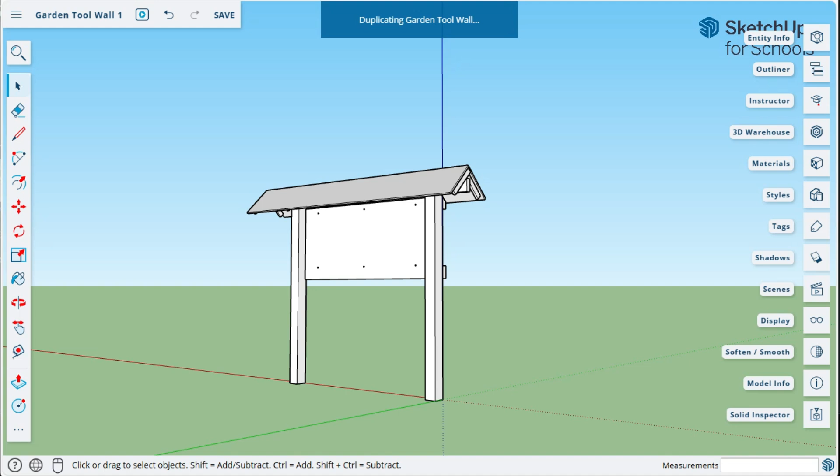In this exercise, we're going to create a little standalone tool wall for the garden. We'll be able to have a cover so we can hang some tools inside here, and it'll be on some 4x4s. We're using 2x4s, 1x2s, and half-inch plywood.

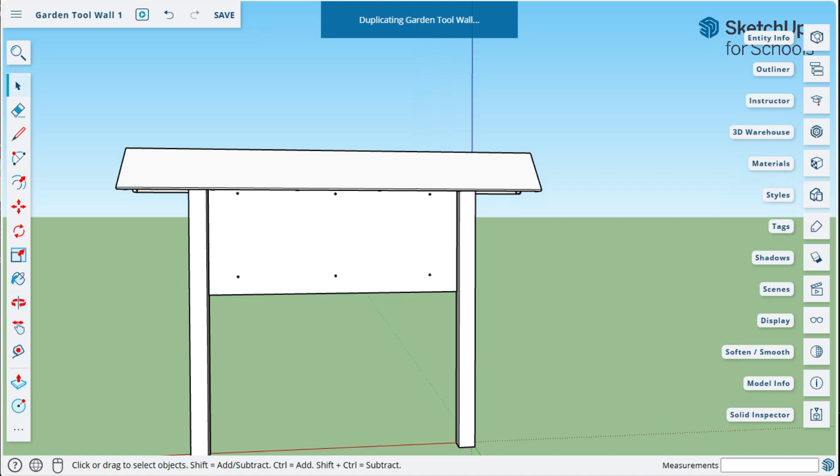So let's begin. We need to move our guy a little bit away from the axis, because that's where I tend to put the start. So I'll just move him off to the side here, and now we can begin.

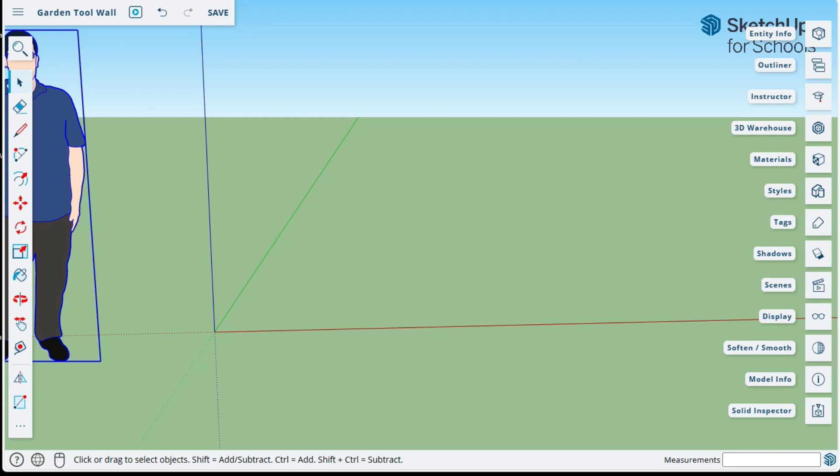So this is going to be based on using 4x4s as posts, some 2x4 cross beams or cross bars, and a little bit of a roof on the top that will shelter the tools.

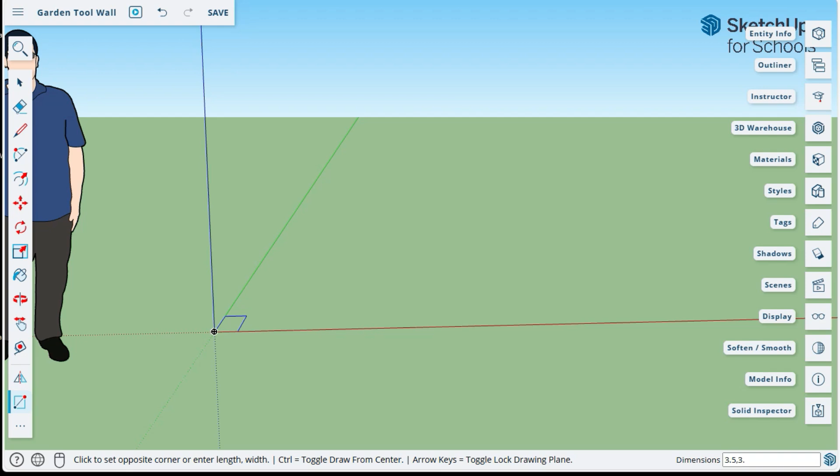And to get started, we'll make our first rectangle. So from the origin, I'll make my first rectangle. It is 3.5 by 3.5 inches. Okay, we have our first, and I'll use the push tool and raise it up 60 inches. That's 5 feet.

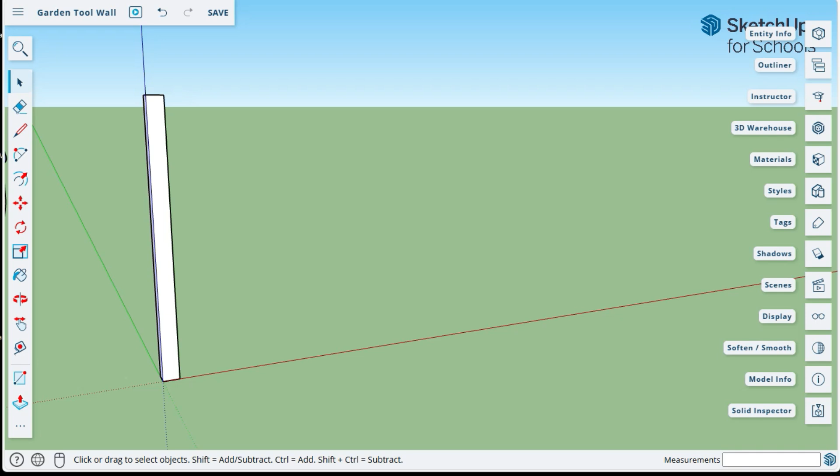Okay, so I've pressed the space bar to select this post. If I click on it once, I can see that I can select one surface or one line, or a combination of that. That means this is neither a group nor a component. And making components as we go is important, so you have to know that. But before we make a component out of this, I want to cut the top off at a 45-degree angle.

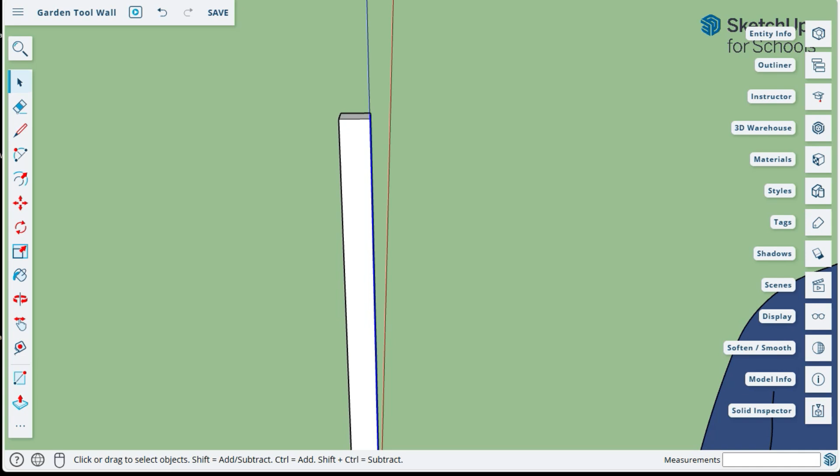Now, if this is 3.5 inches wide, then 3.5 inches down should enable me to find my 45-degree angle. So the easiest way for me to do that is the tape tool. I'll try to avoid clicking on the corner or the midpoint when I do the tape. 3.5, so that's my destination.

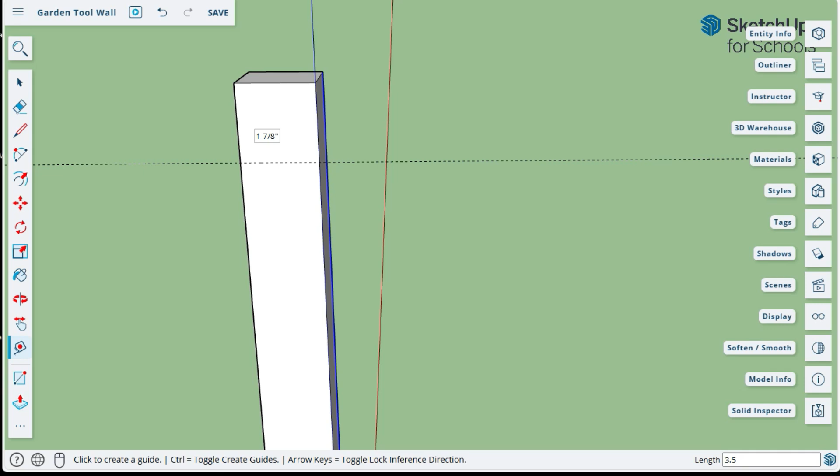And now I'll use the line drawing tool, L for a line. I'll click it here at that intersection. Okay, so I found it. And I can continue to draw a line all the way around, and this back to the top.

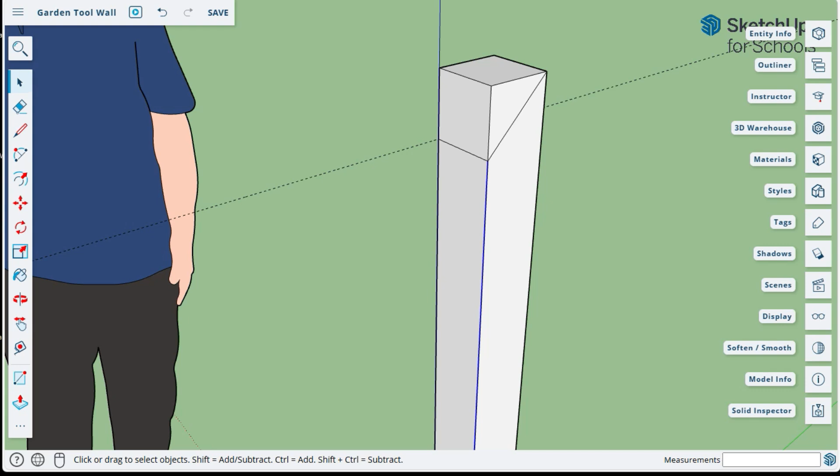And once I've done that, since this is not a component, I should be able to erase, E for erase, these 3 lines and these 2 lines. And now I have a post with the top cut off at a 45-degree angle. So this part here is still 60 inches tall, or 5 feet tall.

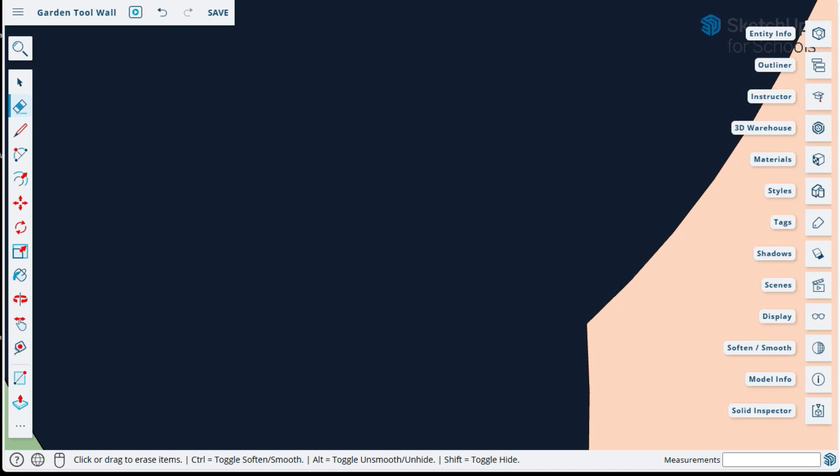Okay, let's get out of the guy. You know, I think we should move him some more. So I keep him there because I recognize he's a good scaler. If I were to zoom out when thinking I was zooming in and then not be able to see my work, I wouldn't know which way to go.

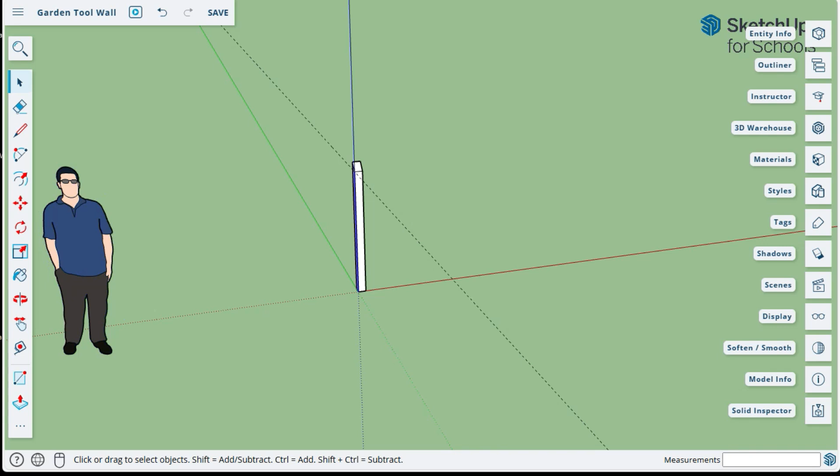Okay, so there's my post. To make a component, I need to select it all. I could draw a box around it, but I'm just going to click it 1, 2, 3 times. Everything is selected. Right click, make a component, and we're going to call this the post. There's only going to be 2 posts. They are identical, so that's a good enough name.

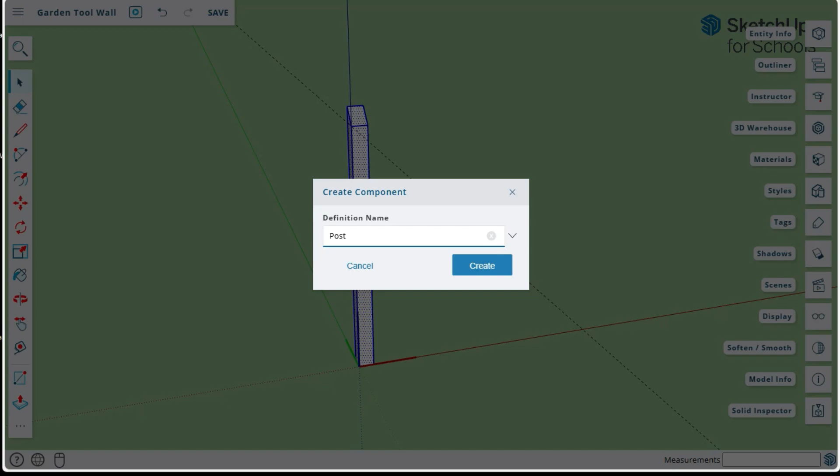Now, when it's 60 inches apart, it's not 60 inches on center. It's 60 inches from the outside to the outside of the other post. Well, that can be kind of a tricky thing to measure. So I'll use the tape.

And I'll start at the origin. I'll go in the direction that I want to. I'll type my 60 inches. I'll press enter, and there's a dot. I was hoping to get a line. I don't think I can get a line? Yeah, I can, of course I can. 60 inches, and there's my line on the dot.

Okay, good. Now I can move it. But instead, let's do this over again. Okay, to measure 60 inches from outside to outside, I'll use the tape, T for tape, off of the green line, 60 inches, enter, and there's my destination.

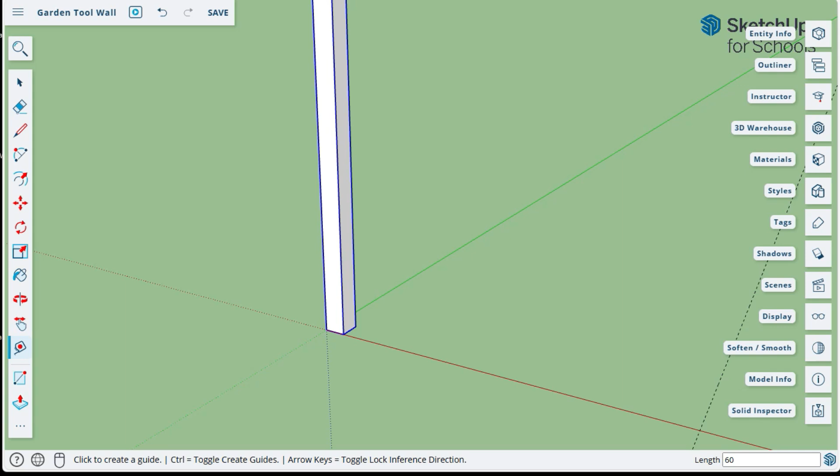So I need to drag this inside corner to here and make a duplicate. To do that, I'll press M for move. I'll grab that corner and I'll move it, and before I click, I'll press Control, and now I click and it's there. I like to press escape afterwards and spacebar so I don't accidentally move something else. So my poles are the right distance apart.

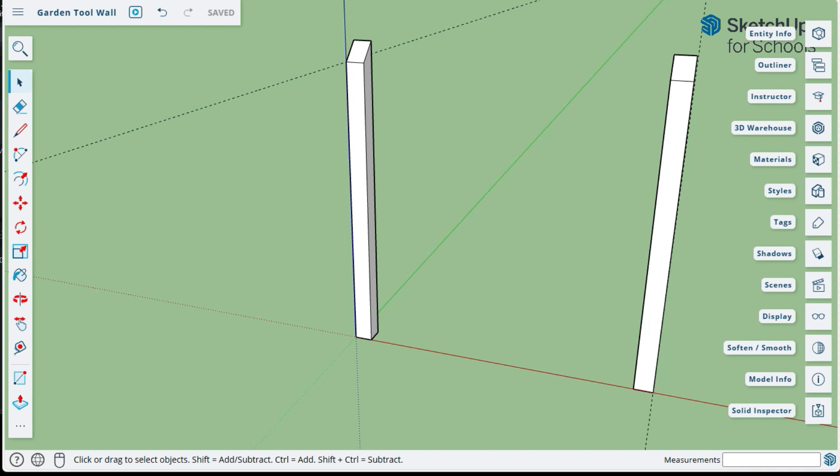Next, I want to create a board across the top to hold up the back side of my roof. This is going to be the back where the slope is. I'll add the geometry to do that, and we'll work right off of this corner because that's where it's going to be.

What we're going to put there is a 2x4. So I'll use R for rectangle and zoom in. It's on the red plane, so I'm going to constrain it by pressing the right arrow there. That should... oh, I clicked it, Control Z. Well, let's try to get it to do it. The right arrow.

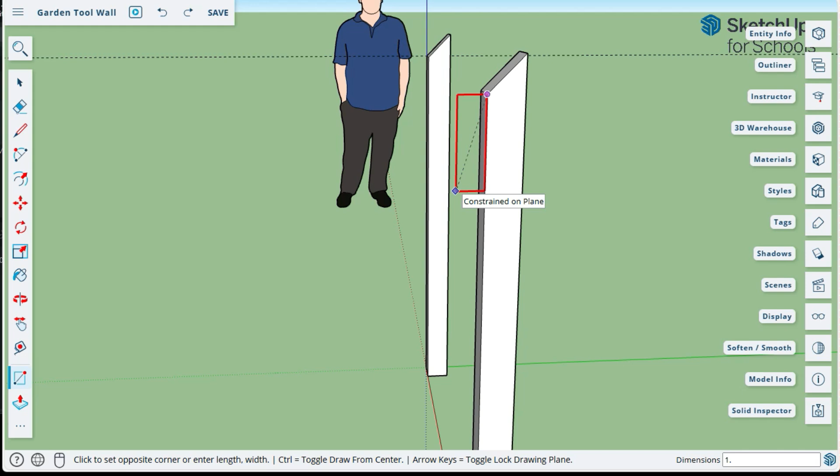There we are. So what is first, the height or the width? Well, if I look here, it looks like the width is first and the height is second. So I'm going to put it on this side. It's 1.5, isn't that true for a 2x4, by 3.5. And I press enter. So there it is.

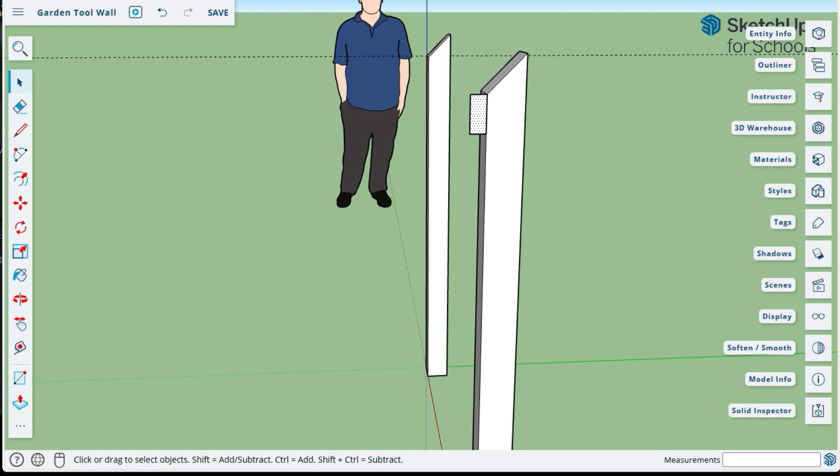Now here's what we have to remember: this is not a component, this is just a collection of geometry. I could triple click this and make it a component now, and that would actually work. I'd have to double click it to edit it, but that's something to know about.

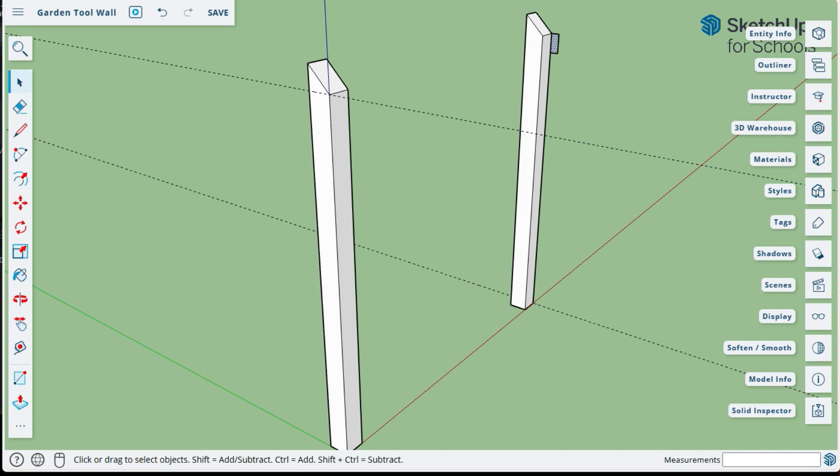I'm going to stretch this across from here to the destination. I always like to adjust my model so I can see clearly the destination. When I pull this across, you'll see me move the pull tool out into this open surface so it knows to snap to or stick to this line. Well, let's stop talking and get to work. So I'll click on this surface, I'll pull it, and then move this to that surface so it's on the face. That's what it lines up to.

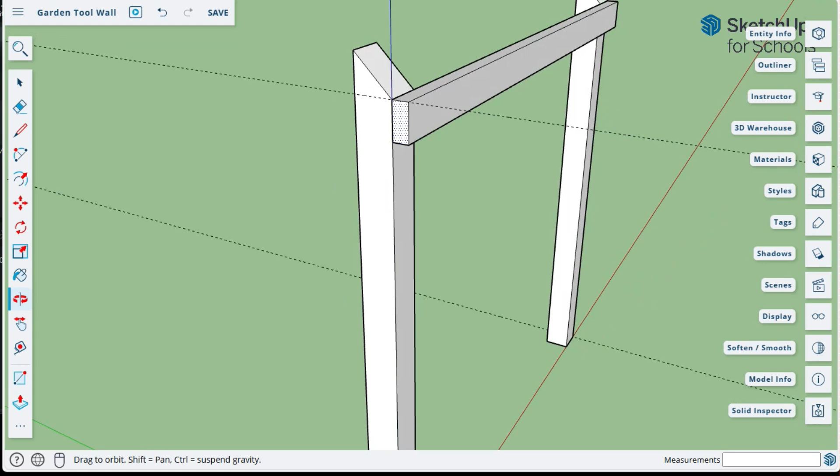So far, so good. We'll change back to the tape because I want to cut this 2x4. I want to rip the angle off to make it a 45-degree cut from the corner down to here. Now I think I can just use a line tool because I have this 45-degree line already. If I click on the corner, the end point, draw a line out, it infers that the line on the other side goes up in that direction. Let's just go down in this direction, and I have it.

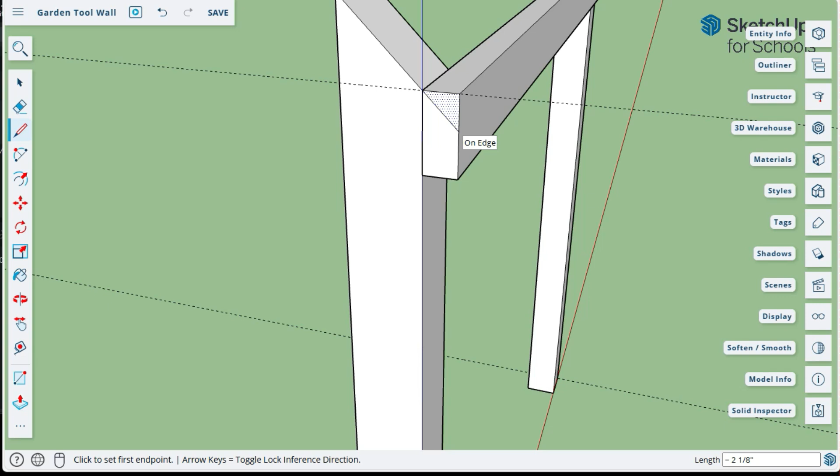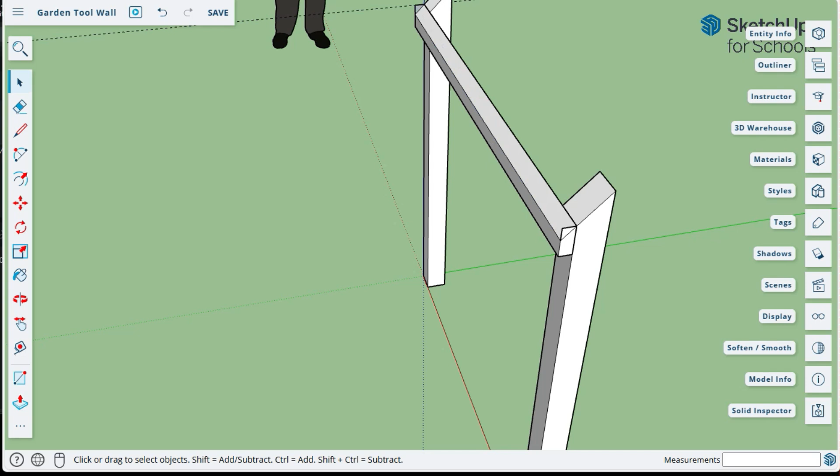Okay, I'll reorient it and draw my line from here. As long as it's red, I know it's parallel, and then it goes from here to the corner. Just like the corner of the post, I press escape, spacebar, click on this line and delete it. It's deleted that section. Now I still have the corners to delete, so what's quicker? Eraser and just cover both, or using the select key, spacebar, and clicking both individually?

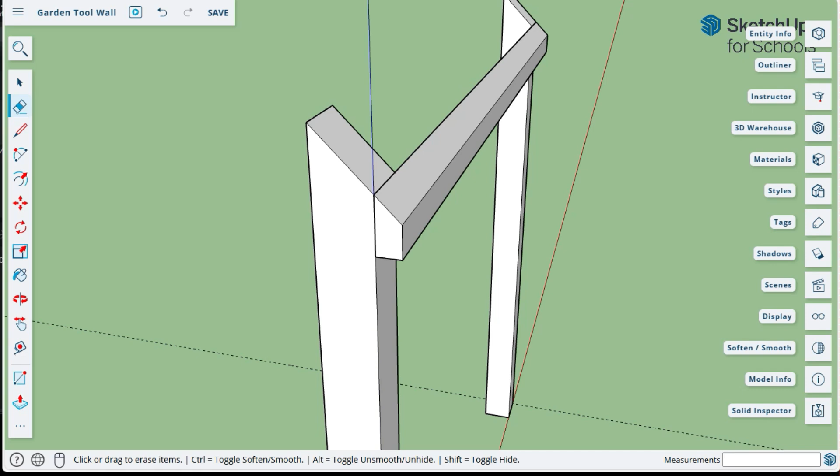Well, that's the 2x4 at the top that has the 3.5 inches here and whatever else is here. You know what's here, right? If we have a 2x4 where it's 1.5 inches down at this point, because that's its width, then whatever's left is going to be 2 inches. So my drawings say that I need another 2x4 about 1 foot 7 and a half inches below this, the top of it.

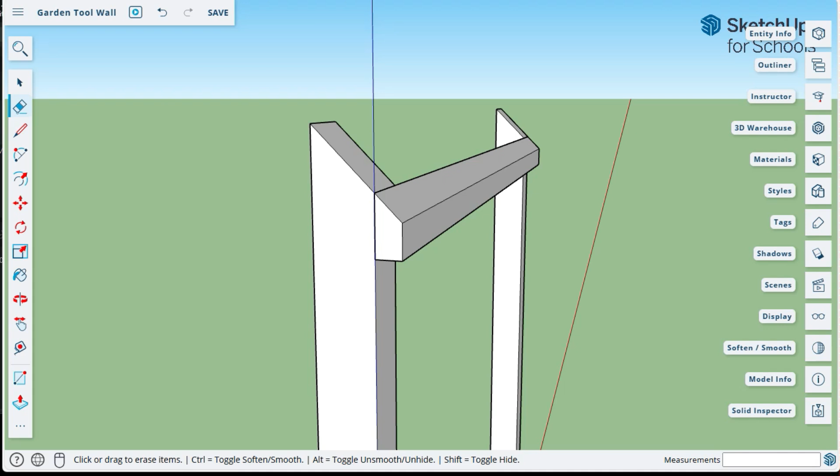So I'll get the tape again, T for tape, and this is where I've run into trouble, and that is if I start from this corner and go down, I'm not sure that I'm going to get a line. In fact, I'm kind of confident I'm not. Let's try it. So what did we say? We wanted 1 foot 7.5 inches. So 1 foot 7 inches and a half.

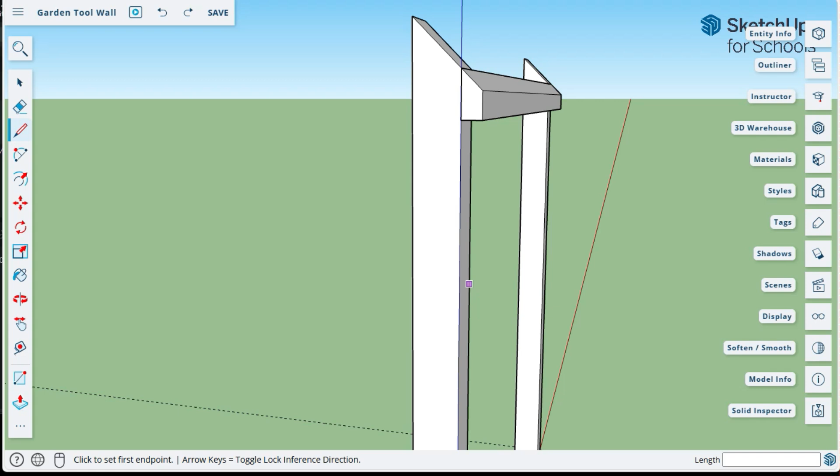And there's that dot. You know, I probably could use that dot, but I've not done that before. Let's do something that we're confident with, but it does involve some more geometry. Control Z will take that away. I'll go back up to here, and I'm just going to put a line out.

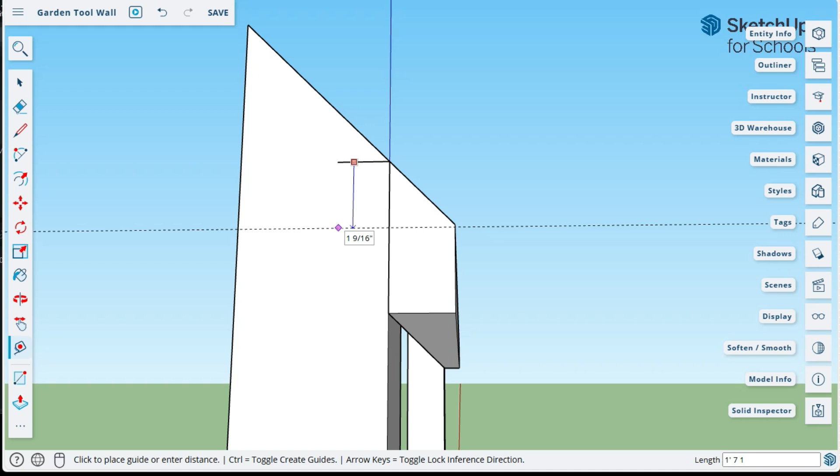There's my line, escape. Now if I use the tape tool, T for tape, somewhere on this line - I prefer not on the ends, not in the middle, there we go - and I type 1 foot 7 inches. I didn't make it a foot, did I? If you're looking in the corner, you'll see that. So it's 1 foot, single quote, 7 space and 1/2 inches. Did I get it? And there it is. Super.

I need to make another 2x4 down here, so this is the top. You'll notice I zoom out up here, move my mouse, and zoom in here with the roller. I just find that almost easier than panning, and certainly easier than shift pan.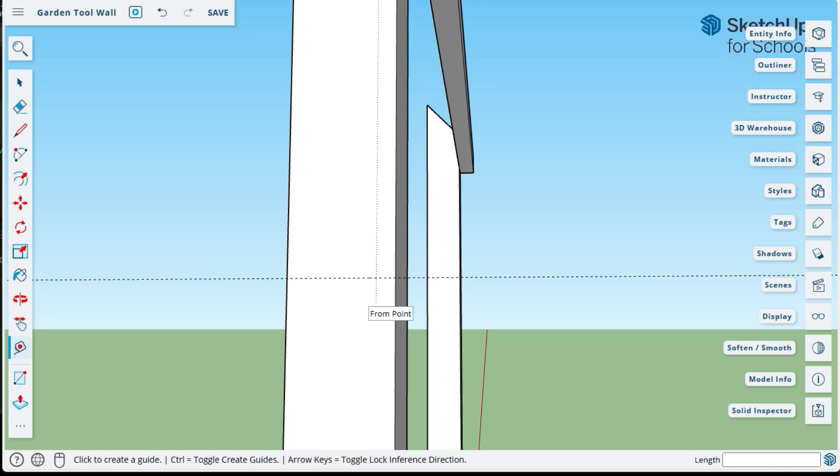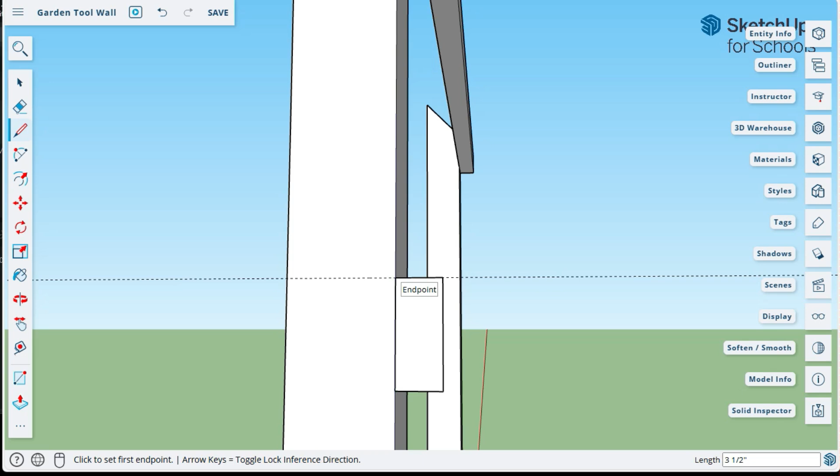Okay, so that's where my next 2x4 is going. This time, instead of using rectangle, I'm just going to use the line tool. I'll start here and draw out 1.5, then draw down - as long as it's blue, it'll be correct - 3.5, then draw back in. It's the standard shape, and then I make my part. This is just a 2x4 that goes from that outer edge to this outer edge. Again, I like to orient it so I can see my destination.

Press the push tool, and I'll click on this. I'll pull, rather, and put it on the surface.

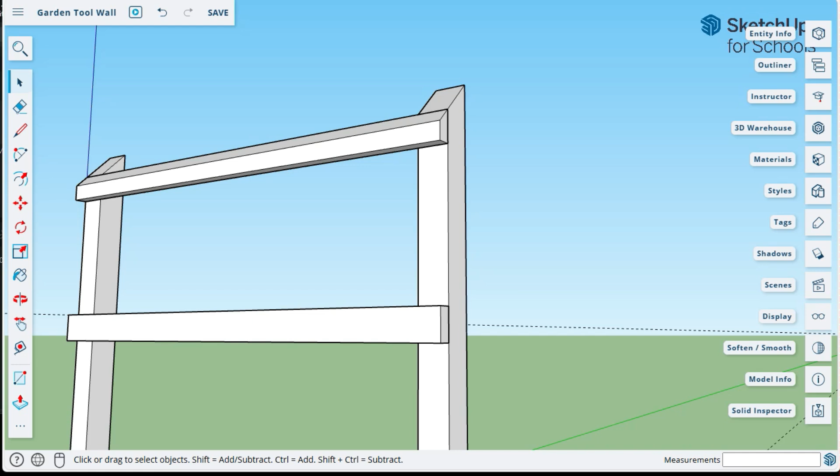Okay, so I just realized I took a risk. Anytime you make a component - rather, you make something that's supposed to be a component - and then you make something else, if they are touching at all, they are going to be one component. You can't separate them. And I did that. So if I look at this, this is not a component yet, and it should have been. As soon as I'm done drawing one of my objects in my sketch, I need to triple click it. There we are. Right click and make it another component.

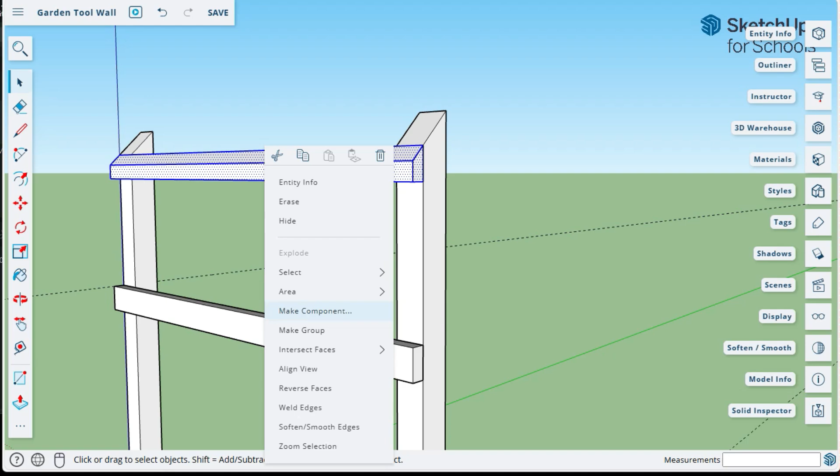So this is going to be - I'm going to call it the top beam. I'll click create, and this is going to be 1, 2, 3, the bottom beam.

Did you notice what I did? I clicked it 1, 2, and it clicked the surface and the borders. If I didn't have a good orientation to see this, let me do it this way. It could seem like I've selected all of the component, but the only thing that would be the component would be the top surface. I bet that's fooled some people. Anyway, I'll click away and do it again: 1, 2, 3. Now I have the entire component, or the entire model of this 2x4.

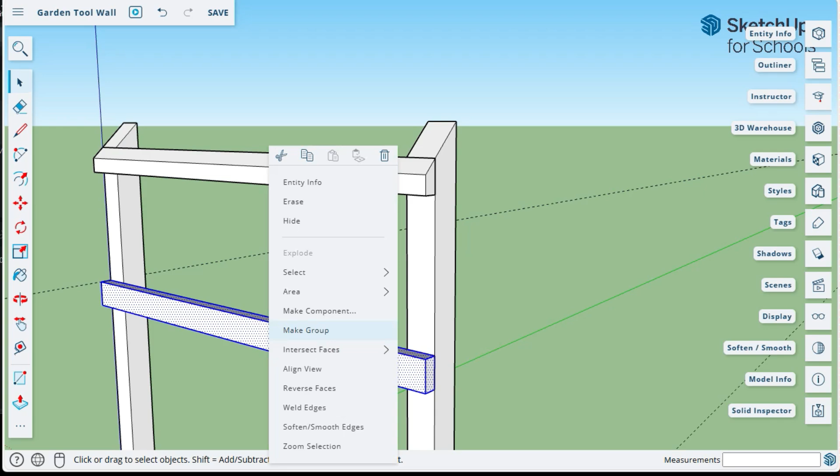Now I can right click and make a component, and this is going to be the bottom beam.

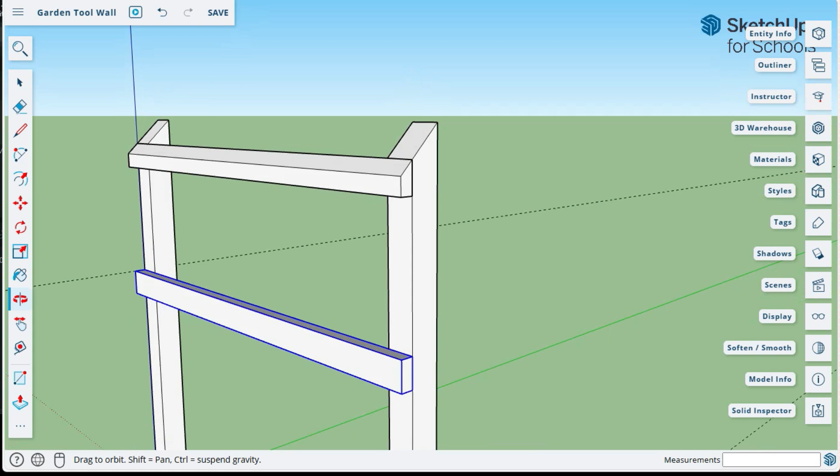Yeah, a guy went to Home Depot, needed to fix where his attic had crashed through and dropped insulation, so got what he needed, went to the cashier, and she said, "Is that all you needed?" And he said, "Yeah, bada beam, bada broom."

Okay, let's move on. So the bottom beam is there. Now I think I'm going to put that flat surface in. Let's take care of this line - we don't want to leave any extraneous bits.

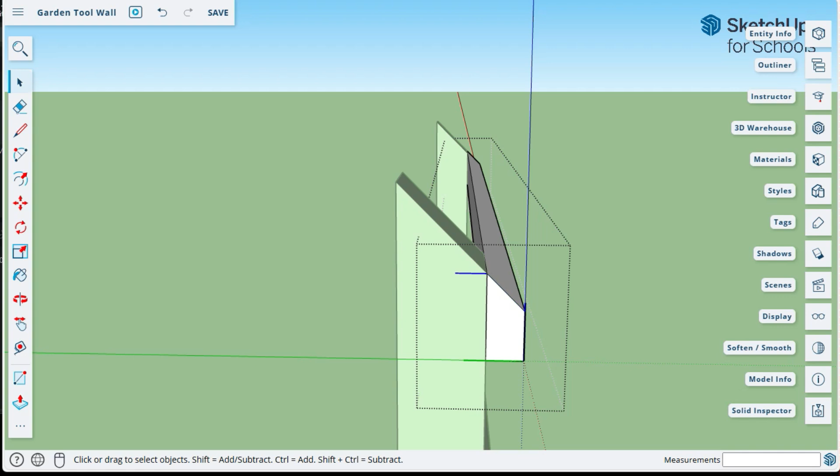Oh, that line is part of this 2x4. So what did I say? Double click that component. There, I double clicked it. Now I'm editing just the elements of that component. I can click a surface, I can click a line, and I can select just this line and delete it. There, now I'll click away, and now we're back to being safe.

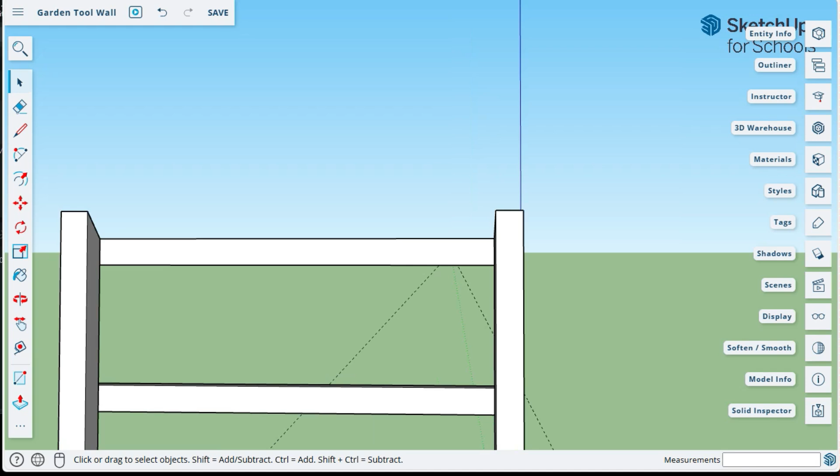Okay, so now we're looking at it from the front, and from the front we want to make a piece of plywood fit just inside of here. So I need a rectangle from here to there, and I think I can just simply do that. I need to go from this corner to this corner, and I need to do it with the rectangle tool. So rectangle from here to here. Now it covers both, okay?

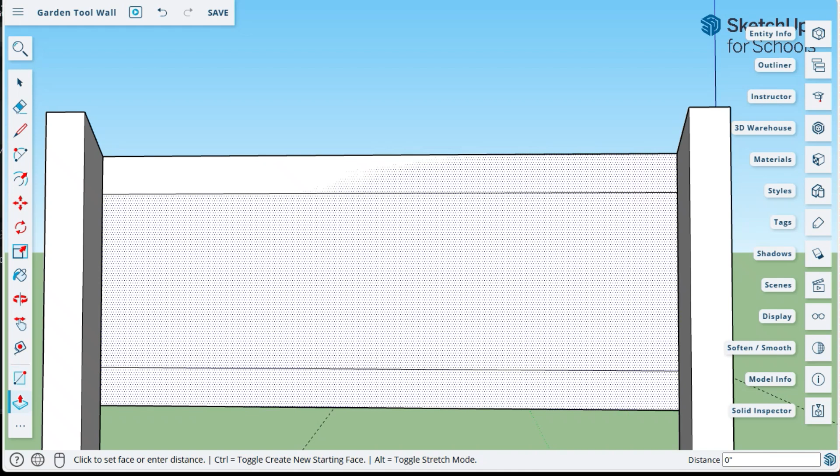And I'll press the push tool, hit the surface, and I'm going to pull it out a 1/2 inch. Well, I pulled it out a little bit without holding the mouse down, so I'll just type 0.5. So now it should be a 1/2 inch. Spacebar stops that tool. I'll tilt it up to look - looks like a 1/2 inch to me.

Okay, so we'll make this a component. And 1, 2, 3 - I have to make sure I do it - 1, 2, 3. Right click and make a component. And this is going to be the backboard.

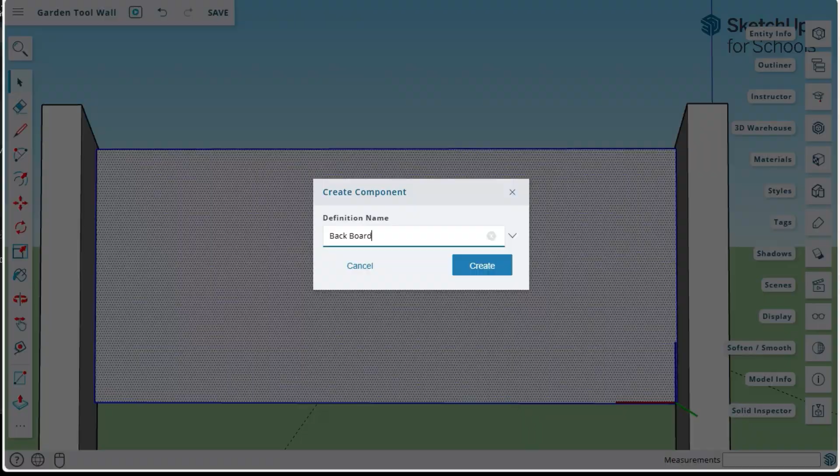Okay, create. Now eventually we're going to want to measure these, maybe even explode this out so we can know what the dimensions of our parts are. But I'm not worried about that yet. Okay, so with those done, I'm ready to do the front board.

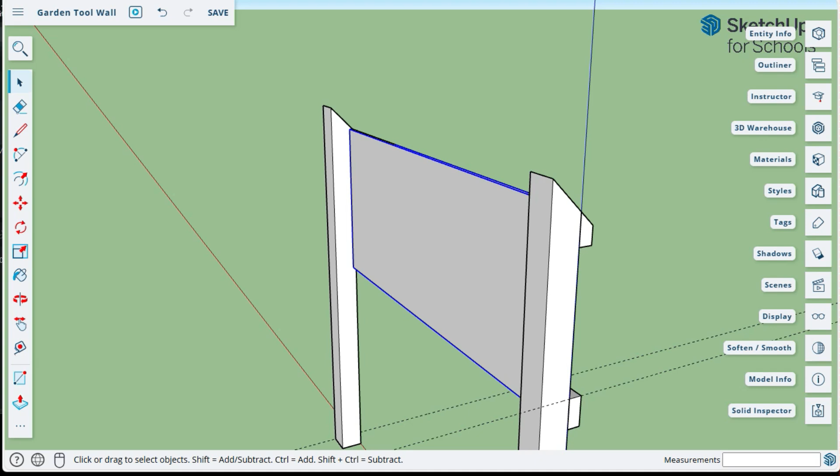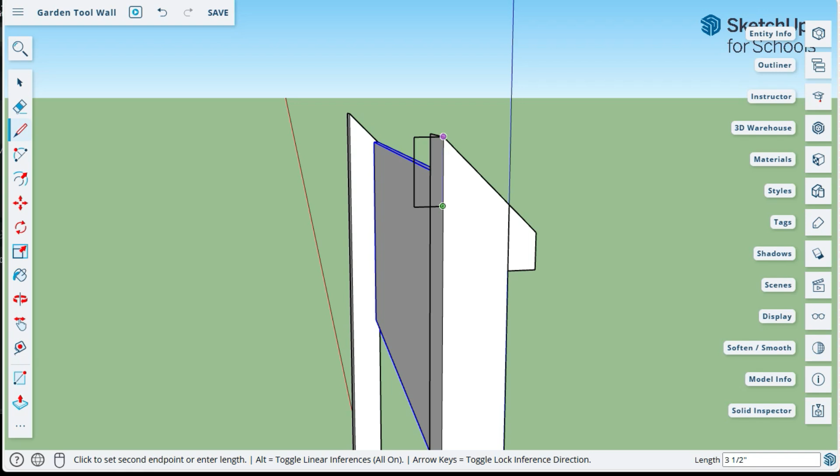So this is going to be the top rail, where our sloped roof is going to be put across. So it's going to be another 2x4. I'll zoom in and use the line drawing tool again, I feel I have a little more control. 1.5, even though the rectangle might make us feel confident that we're making what we want. And then down, 3.5. And then the last two dimensions are mirrors of the first two.

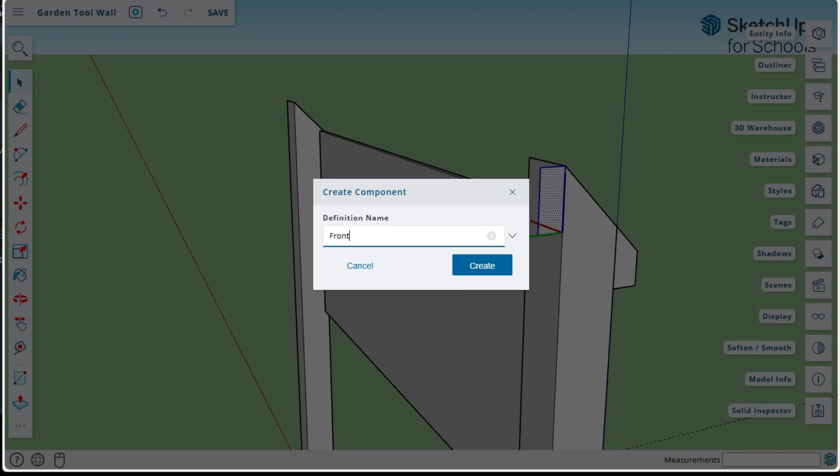So a moment ago I described that I could make this a component right now and then make it 3D. I think I'm going to try that. So I've selected it all, right click, make a component. This is going to be the front beam. Okay, front beam, and I'll click create.

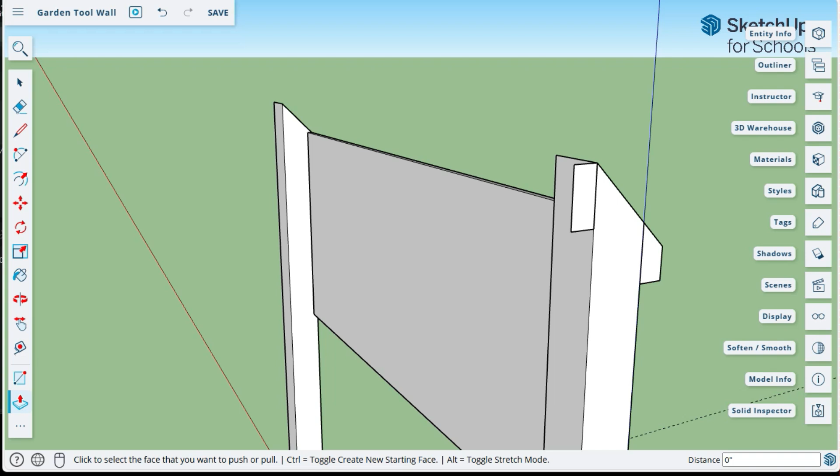Now this one I want to span my 5 feet, but I also want it to stick out a foot on each end. So to do that I'll use the push tool, click on the surface, and nothing happens. Why? Oh yes, I made this a component, I have to double click it. Click, click. So now that component, I can use the push tool and it'll have an effect. I'll pull this out 12, and there it is.

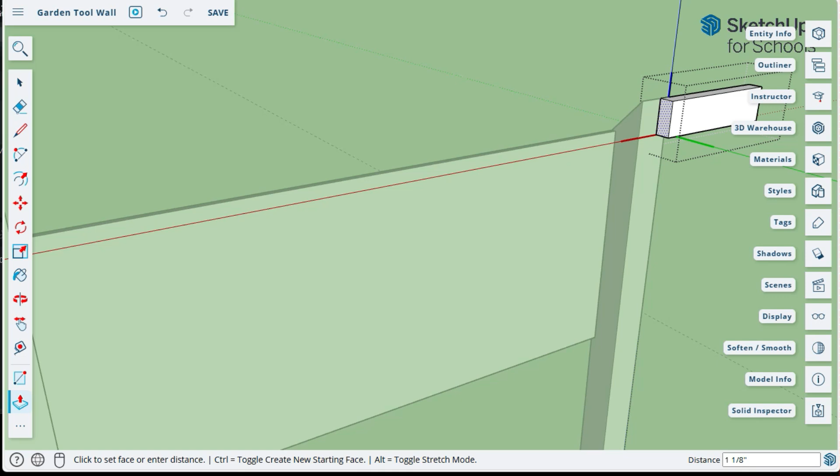Shift it around this side. Now I can get the destination there, but I'm just going to pull it out, and I know it has to go 5 feet, and then 1 more foot, so I'll just put 6 feet. Now I'll take a look and see if that did it. It did, good. I'll spacebar and click away. So now that's my top beam. We're ready to put a truss on, well, such as it is.

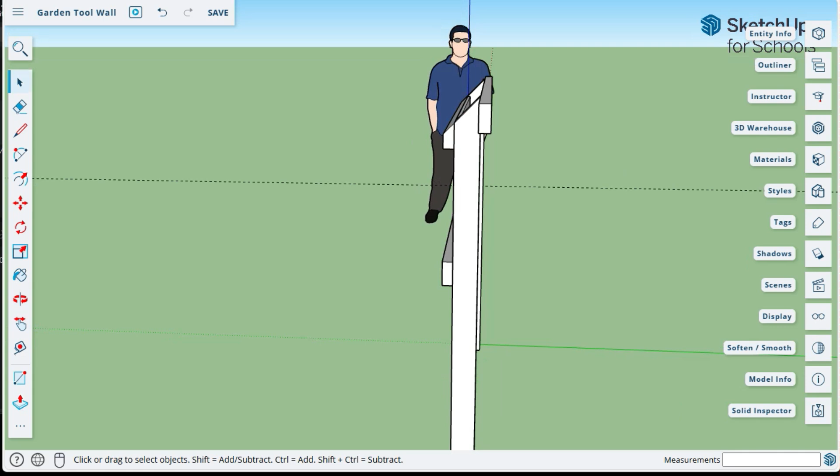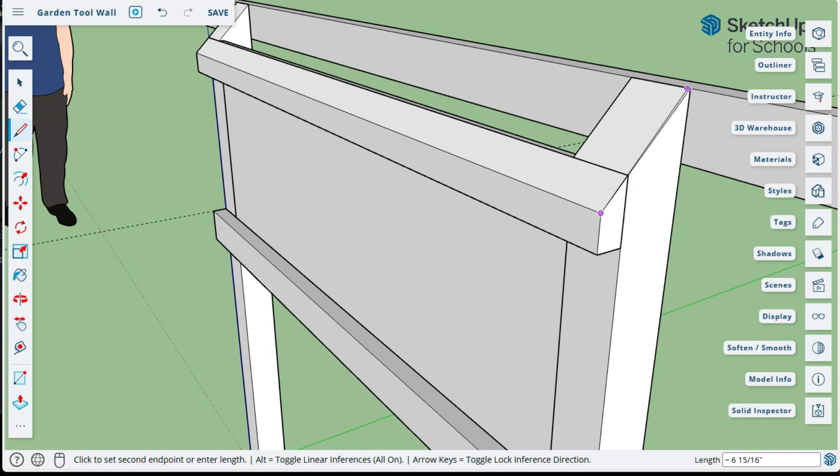To make the trusses, we'll orient this so we can see this edge, and we'll make our 1x2 lay along that edge. To do that I'll start with a line, draw from here to the top, and I need it to go over by 0.75.

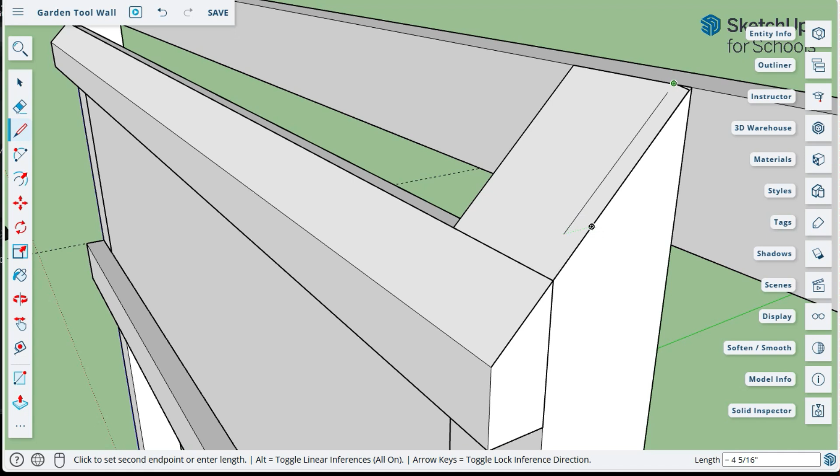Then back down. Now, how do I know it's 0.75 down here? Well, I think if I touch the line here and pull it out, it will create an inference, and I should be able to see that inference. And I don't, I wonder why. Well, if I look up here, what do I have? How did this happen? Oh, this didn't meet my model, but it looks like it if I orient it this way. All right, well, we have to fix that, control Z.

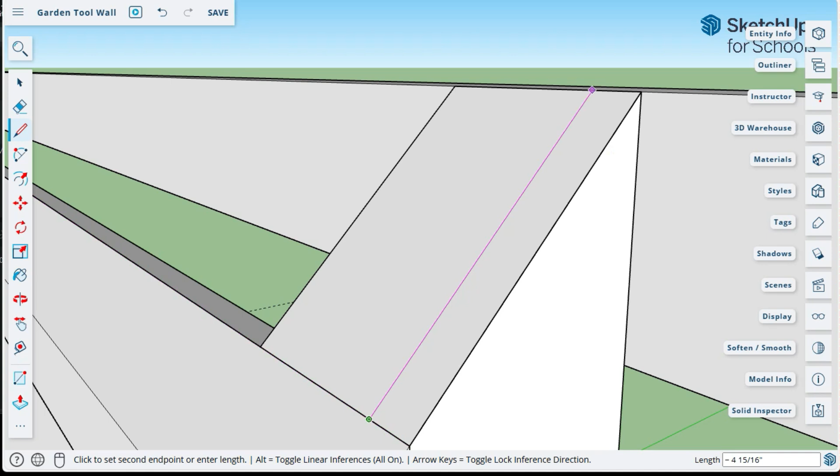So the line is gone. So endpoint, that'll work, and down to here, endpoint. There's a line. I'll put it across that same 0.75. Okay, and then up, and now I have the inference, that's that lavender line, and a line across the top finishes it.

Okay, so I've drawn this rectangle over the top of this model, this component, so it's not supposed to stick to it. If I press the P, push/pull tool, I will pull it up. And how wide is a 1x2? I think it's 1.5. So 1.5, yeah, that looks right.

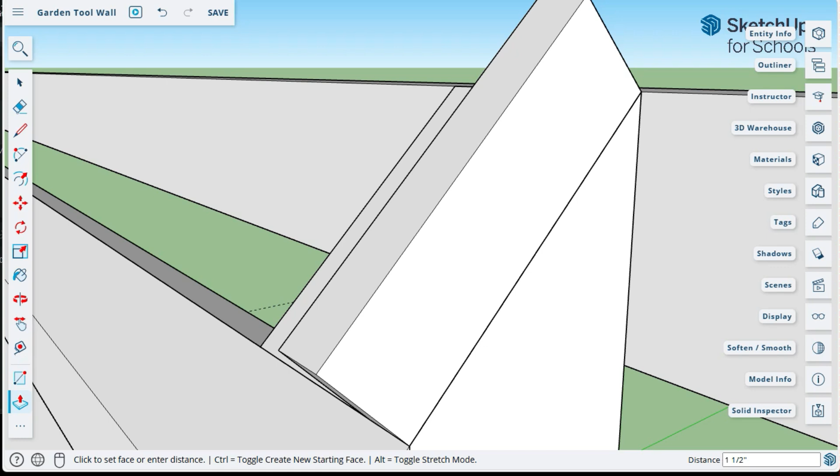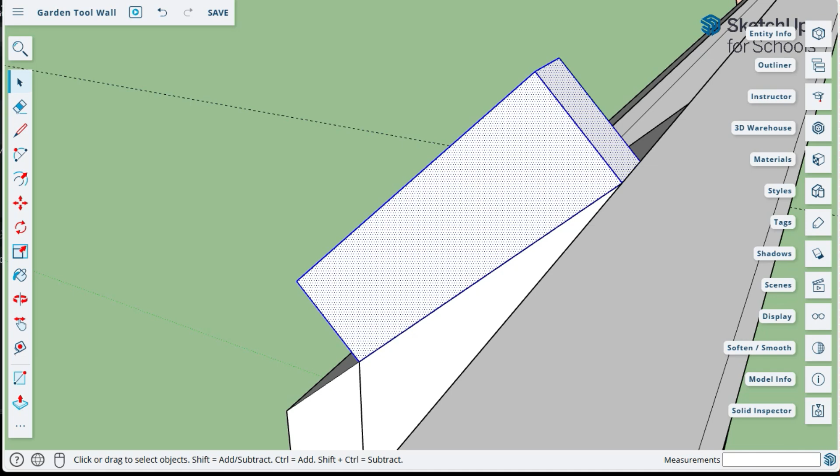And so it doesn't get messy, I'm going to make it a component, and I'm going to call it a truss board. Yeah, that's what I'll call it. I think right click, make a component. And since it might be different from the front, I'll call it the back. Back truss board. Okay, so it exists.

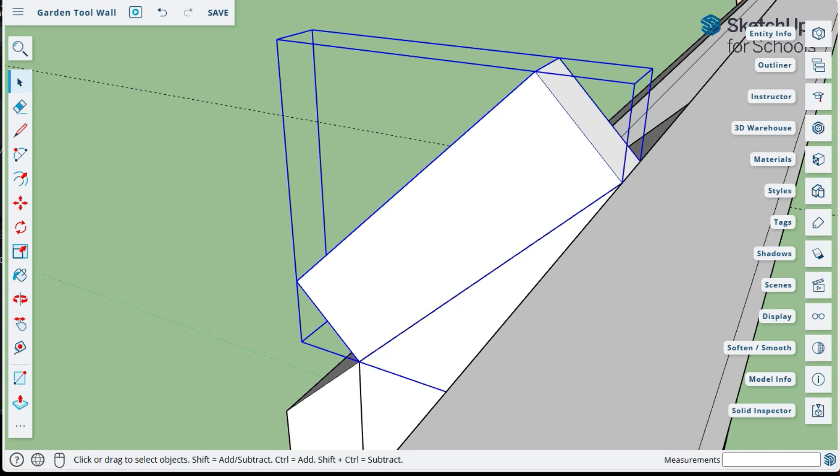To edit it or to change it, I need to double click it and use the push/pull tool to make it go up, because it's got to go across the top. Oh, I don't know how far to go. I'm just going to go that far, some arbitrary number. What I do know is that if I make another one at a 45-degree angle going down this side, then where the two upper corners meet will be in the center of this.

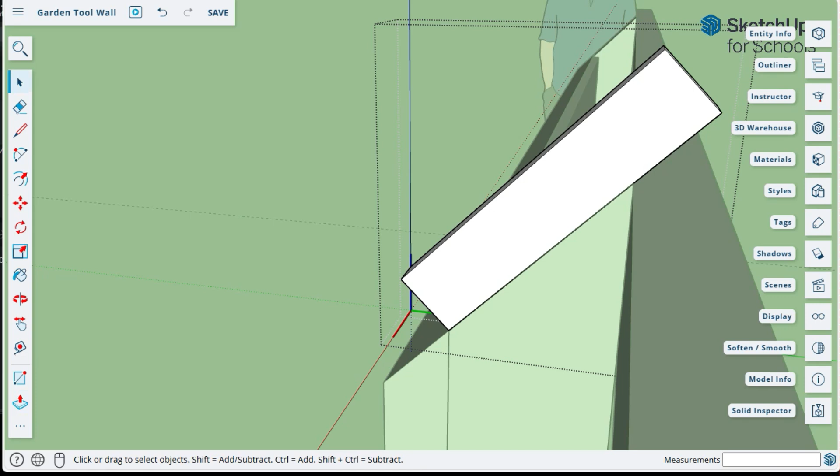So I'll just put a line there, some geometry to find it. Spacebar to get out of that, and I'll find the tape tool. What's half the width of a 2x4? Isn't it 0.75?

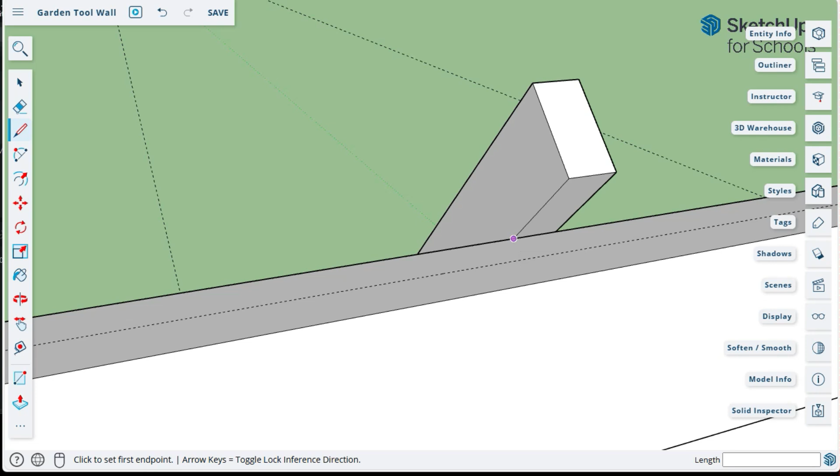That looks like the middle to me. And then, oh, it looks like I need another line. I'm just going to draw a line from this intersection and point in the post.

Yeah, let's try this one. Intersection. Make the line on the green axis, make it go all the way across, and then click it. Okay, so now I have something that's related to this surface, and I can find the center.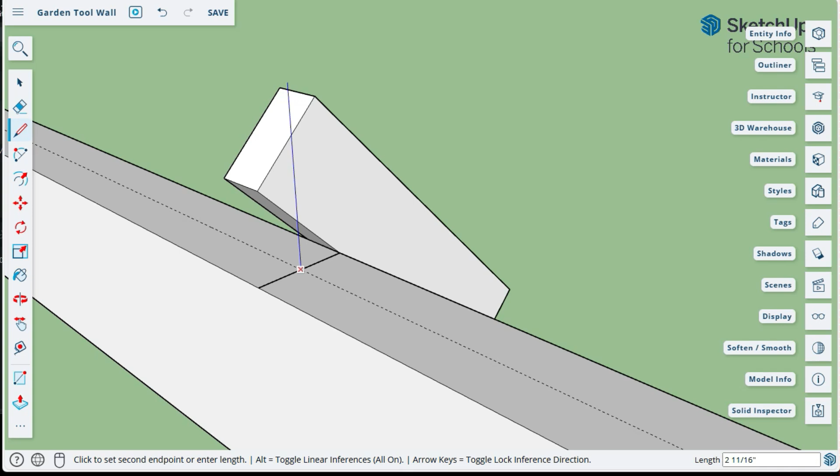Press escape because I want to make a new line straight up. Now, as long as it stays blue, I can just go up. Otherwise, I can press the up arrow and constrain it to blue, which I like to do. So what this means is I can press escape.

I can pull this surface until this meets the line. And hopefully I made the line long enough. So let's try that. So 1, 2, 3.

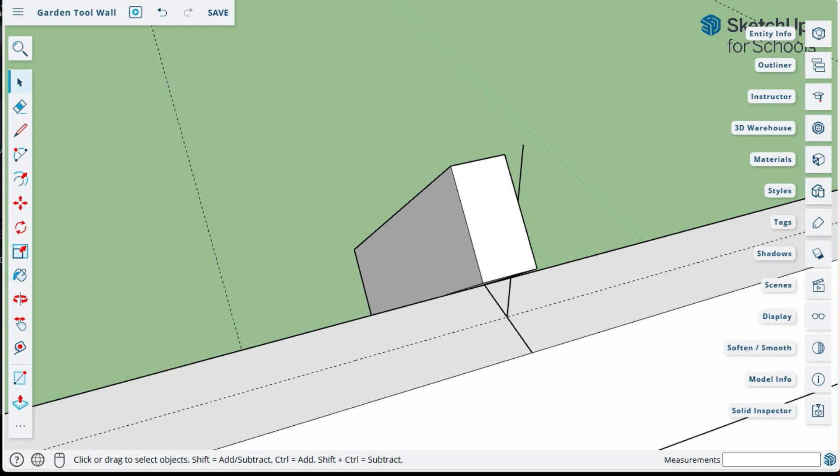Now I'm editing this. Notice the line that I just made is gray. That means it's not in this component. That's handy. So push tool, I'll pull up.

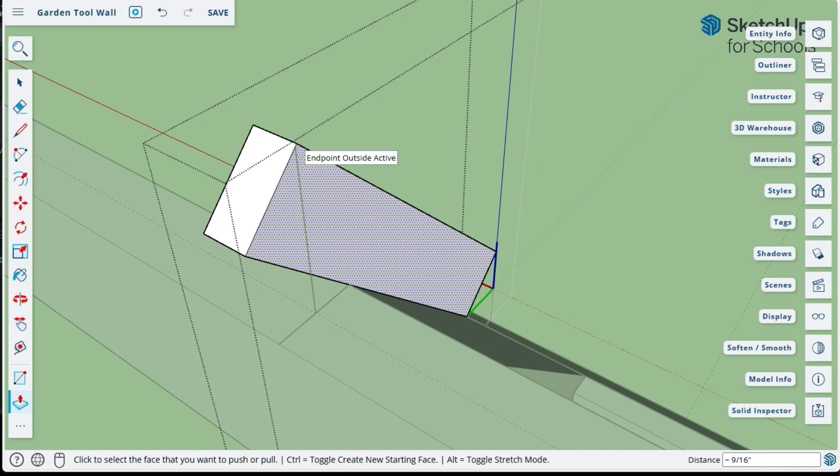Oh yeah, let's change the orientation so that I can see and touch the top of that line. And when I do that, I know it's there. Okay, good. That'll work. Press escape, spacebar, click away, select that line, delete it, the other line, delete it.

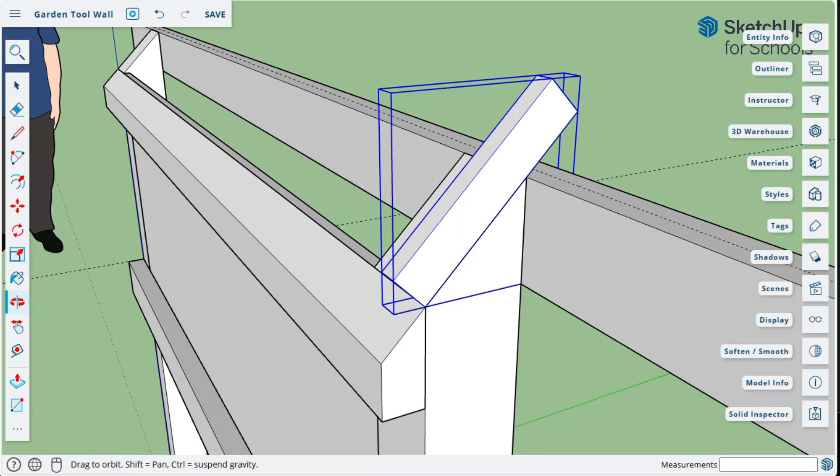I suppose we could get rid of this, but let's do the tape later. So I need 2 of these. So we've made our board. Now we need one on the other side.

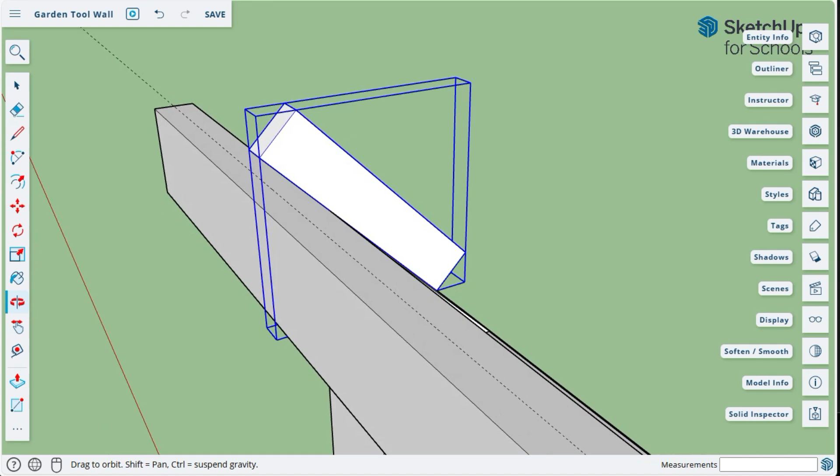And to do that, instead of duplicating it, copying it, and moving it over, I've actually done a model of this before, and even though I did my best, the ends didn't quite line up. So when I wanted to make the surface board based on the corners of these, the surface wasn't in the same plane. So what I've done in others that did work is I've just drawn the new geometry here.

So I will draw off of this one our board. So using a line drawing tool, we'll draw a line down here, and then it needs to be

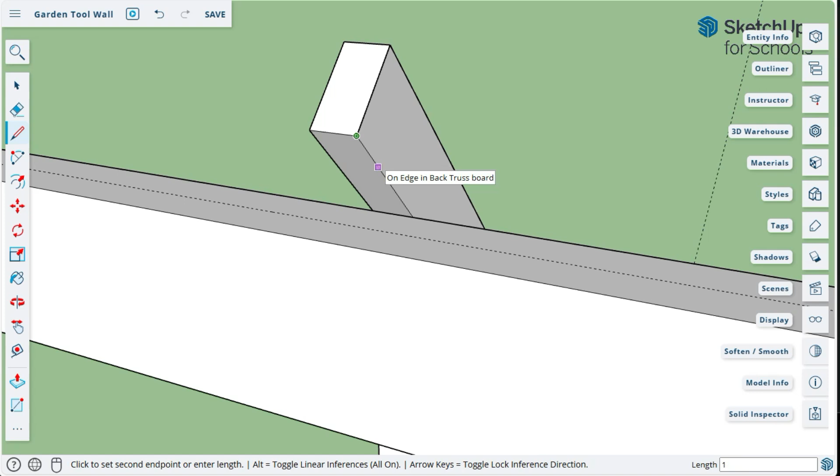down the width of this board, which is 1.5, isn't it? 1.5. Okay, and then I'll draw, there it is, perpendicular, and back up, and I should have my surface.

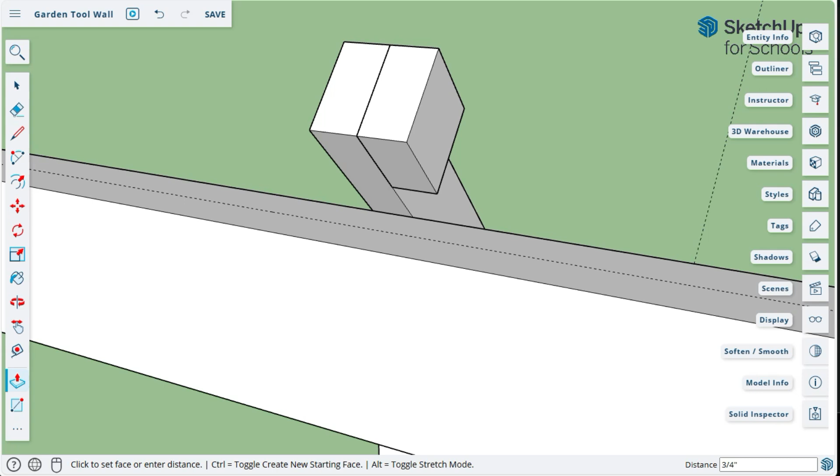Escape. I do. So I can pull that 0.75 away, and because I used all of those surfaces, it is lined up. Let's make it 8 for now.

Okay, so I have my truss. I'm going to call this a truss. My 2 boards for the truss. I will select both of them.

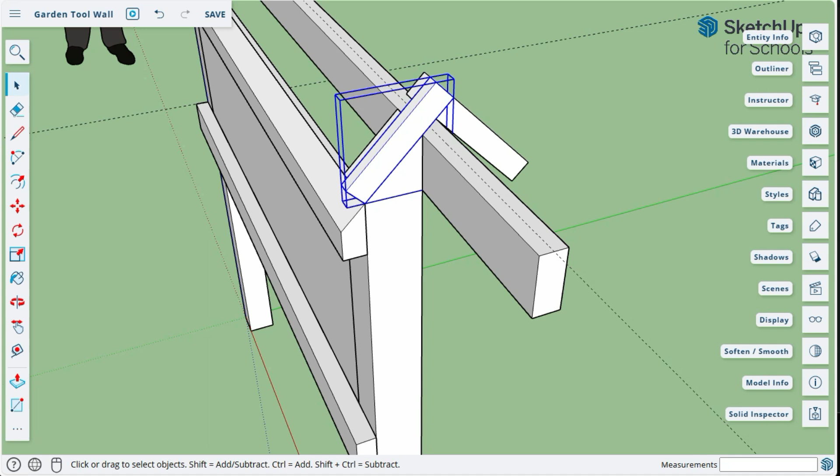And I believe I have them both selected. Let's try that again. This one, hold the shift key. This one. Oh, I've selected one surface. That's because only one of them is a component.

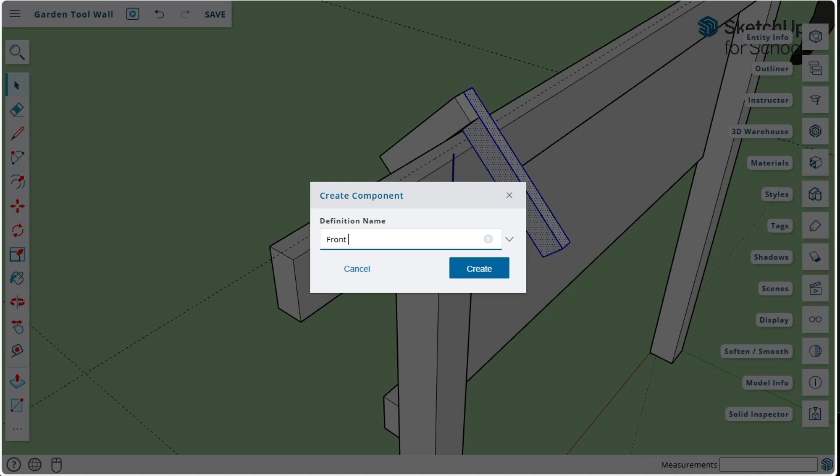Okay, this one needs to be its own component. So this is going to be called the front truss. Yeah, a big name for a small board, but that's the job it's doing.

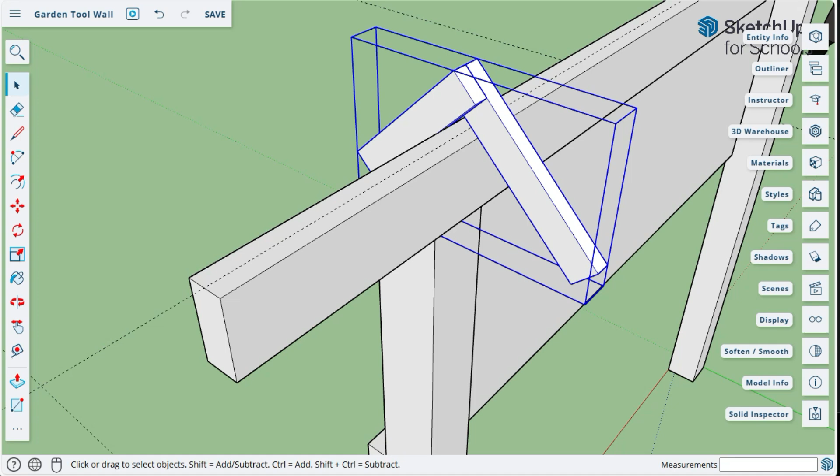Okay, now it's a component, and those 2 components can be grouped together, or rather not made a component, but simply grouped together. So now I need to move this to the end, and I don't think it's going to be easy. I don't think I can find an exact spot where this board touches this board.

We'll try it. So if I use the move tool, I'll grab there. It's on the edge. Yeah, I know it's on the edge, but is it? I'll zoom out that way.

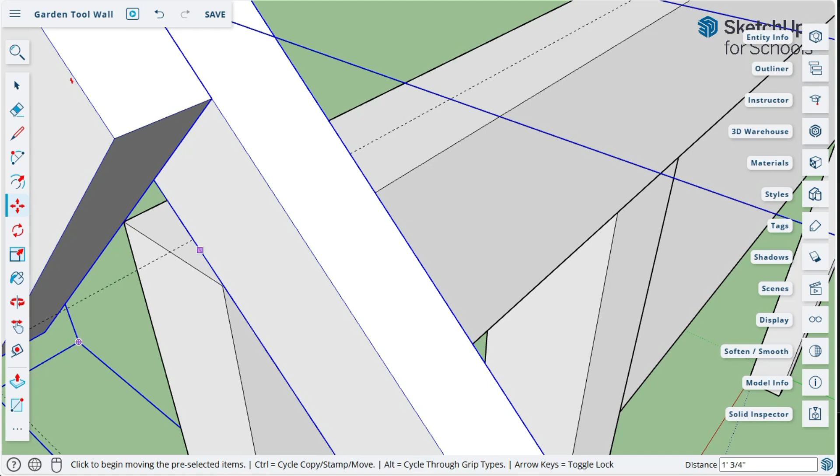I'll go here and I'll zoom in a lot here, and I'll go to the end, and well, that is the end, but I went too far. I should use this edge. So Control Z, my bad.

I'll flip it over. Let's get the orientation. One thing I do and spend more time in, and that is getting the best view to do the work. I think it makes my job easier to move things where I want. So

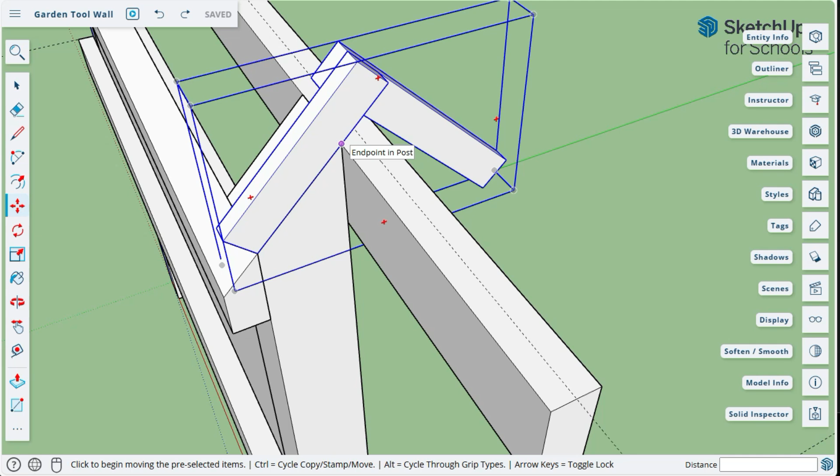This is lining up with the endpoint. That actually makes sense. I'll constrain it to red by hitting the right arrow. And I'll move it down here. If I move my move tool across this surface, it aligns up with that surface. So there it is. Yay. Now we do want to